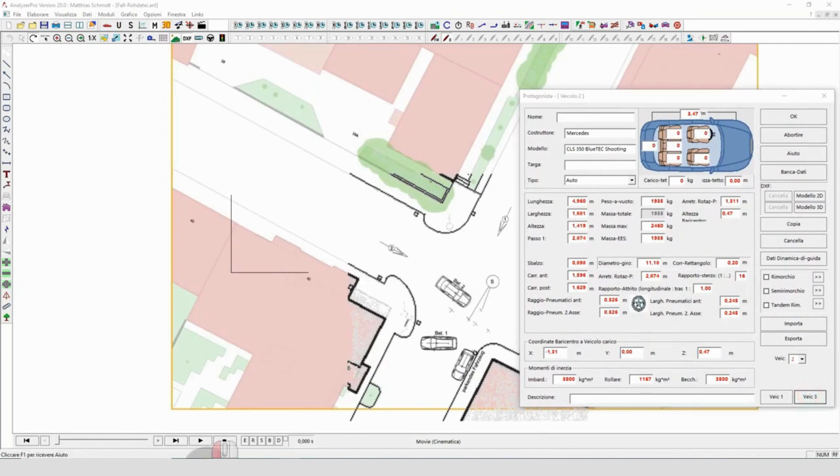Only the map with the accident sketch by the police and the vehicle data for a VW and a Mercedes have been prepared. The VW comes in the direction of vehicle 1, while the Mercedes comes in the direction of vehicle 2. Furthermore, you will find photos of the damaged vehicles in the folder, where it is clearly visible that the Mercedes has hit the front into the side of the VW.

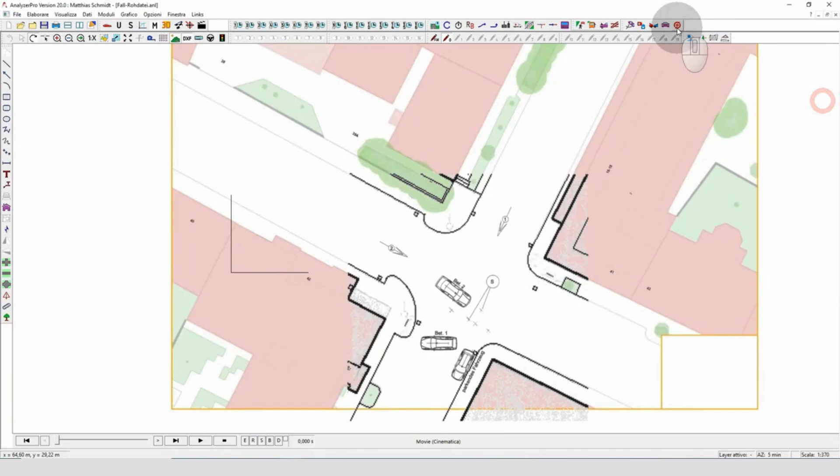Not clear, however, is the question where and how exactly the accident took place, as there are no exact trace drawings and no witness information is available. We do know, however, that the two roads are one-way streets and that the vehicles must most probably have driven in the middle of the road. We now want to solve this problem with the new Optimizer in Analyzer Pro.

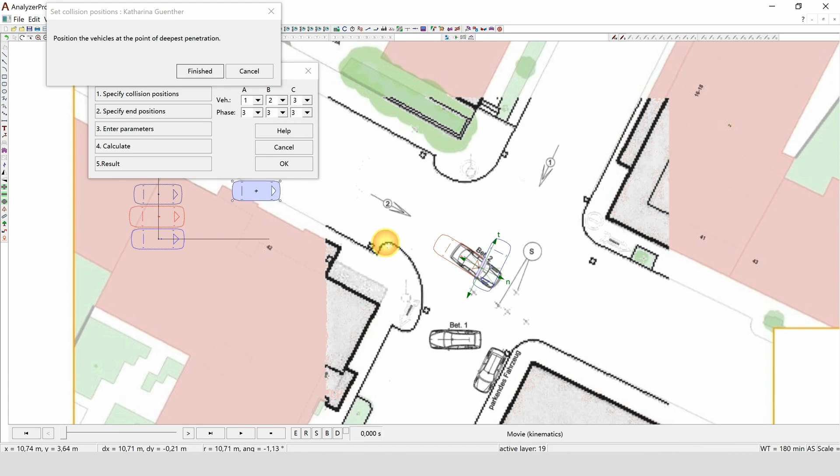To do this, we open the Optimizer and a small window appears. We are now prompted to work through the relevant points from 1 to 5. In the first point, we need to position the vehicles in the presumed collision position, assuming that the vehicles were approximately in the middle of the road and that the damages roughly match our damage pattern. In this case, there is also a third vehicle that was parked at the roadside at the time of the collision.

In the second step, we specify the final positions of the vehicles. These need to be as securely determined as possible. Fortunately, there is a corresponding police sketch available, which makes entering the final positions easier.

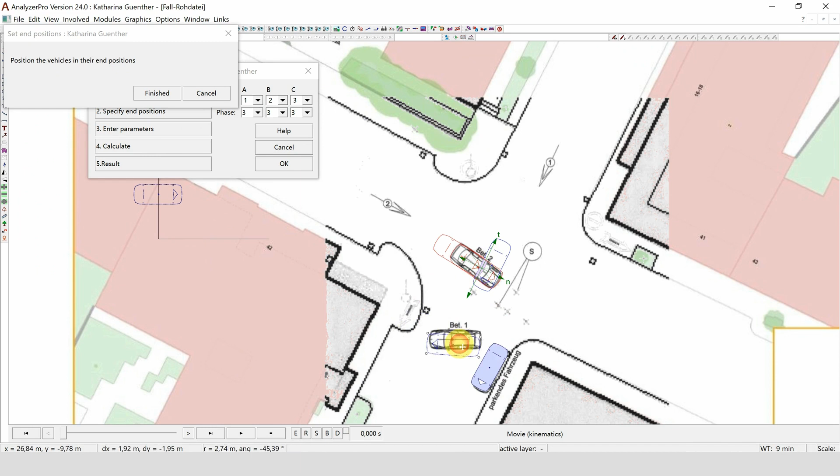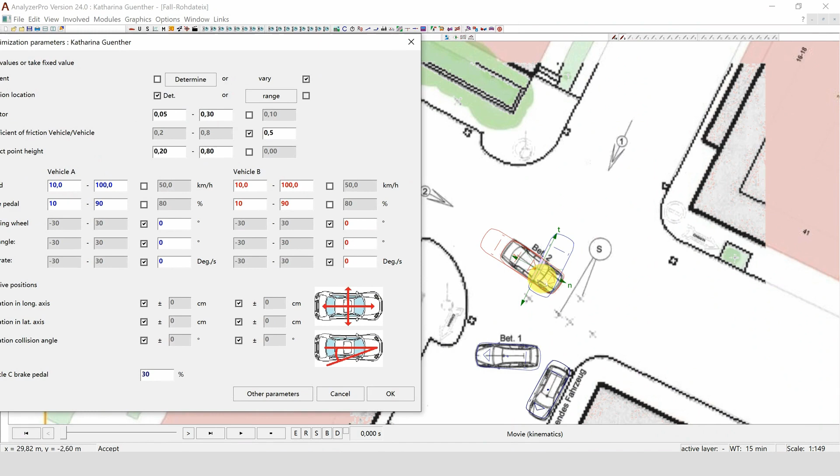In the next step, we need to define the parameters to be varied. We have a large number of options here. The first parameter to be varied is the position and rotation of the tangent. Since we almost never know this, optimizing the tangent is definitely recommended. The overlapping area of the two vehicles is considered in this process.

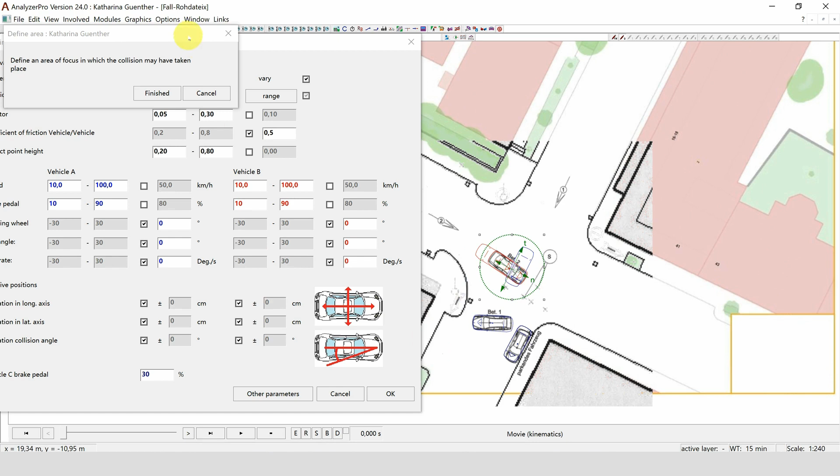Furthermore, we have the specific problem that we do not know exactly where the collision occurred. We can either determine the collision location or specify an area where the collision took place. Clicking on Area displays a green circle that should enclose the position of the vehicles. Various solutions are then sought within this circle. The circle can be adjusted and dragged if necessary.

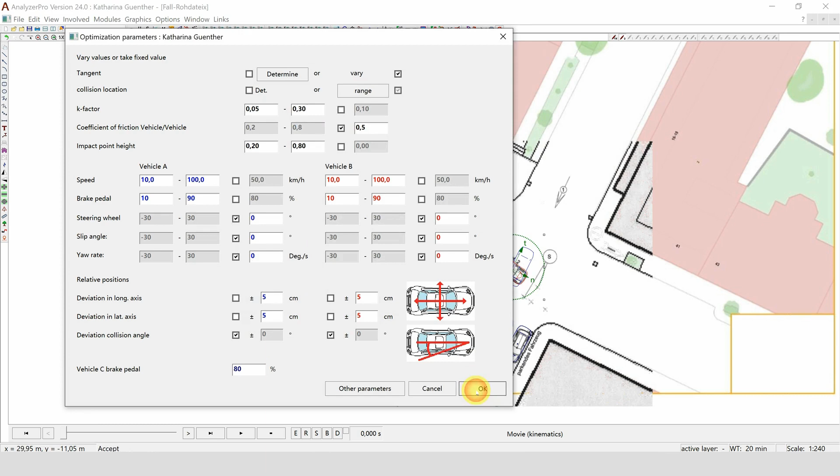Typical parameters such as the K-factor, friction coefficient, speeds, braking behavior, and steering angle can also be varied. In the Other Parameters section, time-dependent parameters can be specified, and K-factor and friction coefficient for secondary collisions can be individually determined. Once we have made the desired settings, we can click on the Calculate button. The analyzer now simulates various constellations of values and tries to find an optimal range in which the solutions lead to an ideal final position.

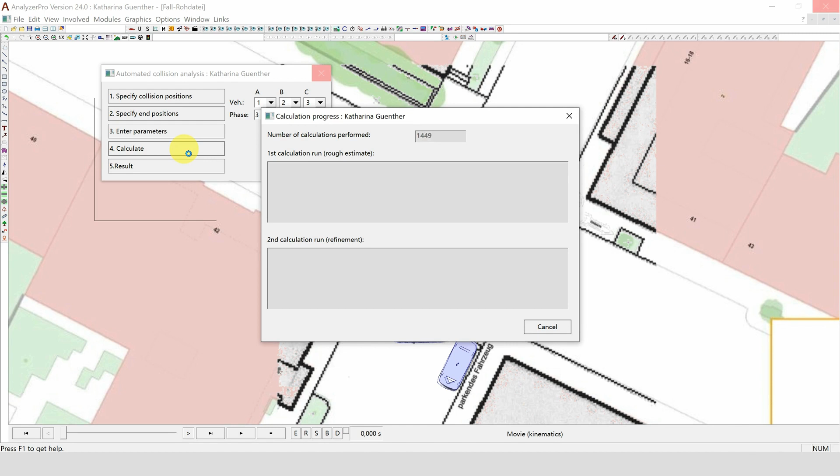Analyzer Pro calculates up to 10 different solutions. Especially in a case like this, where a different collision location is specified, there can be significant differences in the solutions. The solutions are all rated with a certain quality, providing information about the proximity to the final position. The quality is calculated based on the deviation of the centroids from the final position and the deviation of the course angle from the course angle of the final position.

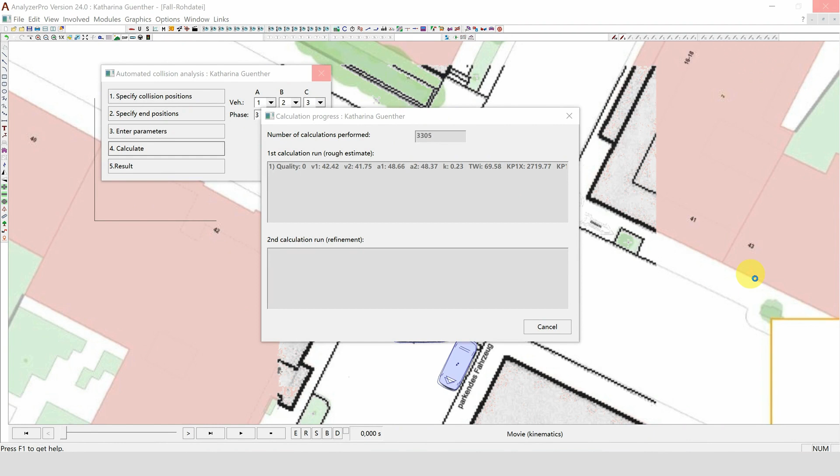The first 5 calculations are performed a bit faster but with a lower accuracy. In the second calculation run, calculations continue until a sufficiently high quality is achieved. The highest possible quality is 100. If you do not want to wait until all 10 calculations are completed, you can click Cancel at any time. The calculations already performed will then be displayed accordingly.

Once the calculation process is complete, the 5th and final window is displayed. Here, you see all possible solutions of the calculation process listed. You can now click on Details and output your calculation result in numbers into a text document. You can select the different solutions and see both the selected collision position and the final position, as well as the chosen point of impact.

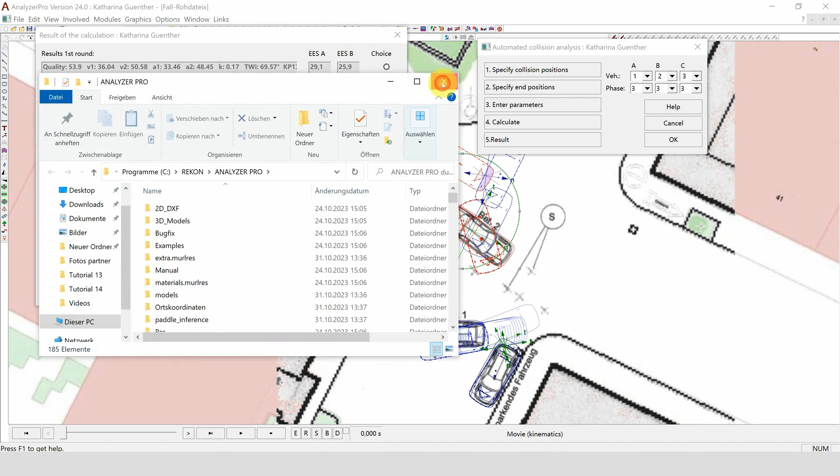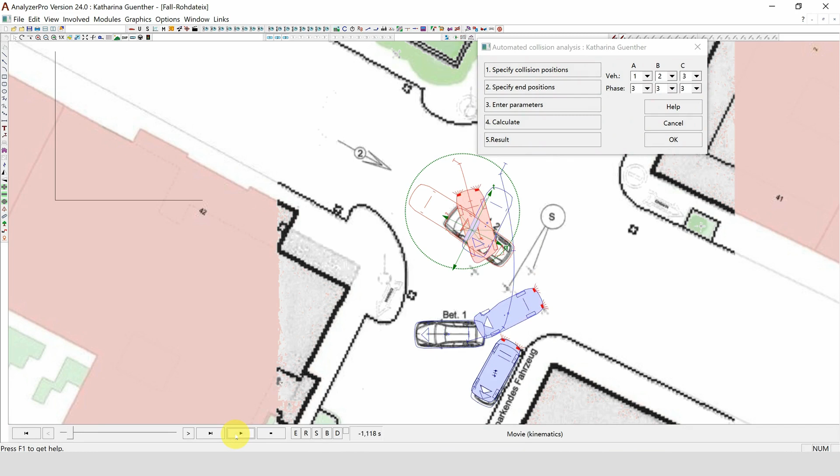You are now prompted to choose a solution that seems suitable for you. Since in our case the parked vehicle on the right side of the road showed minor damage to the rear, it is plausible that the solution shifted to the right represents a good result. Once you click on Transfer, the data will be transferred to both the collision analysis and the kinematics window, and you can perform the pre-collision analysis kinematically as usual.